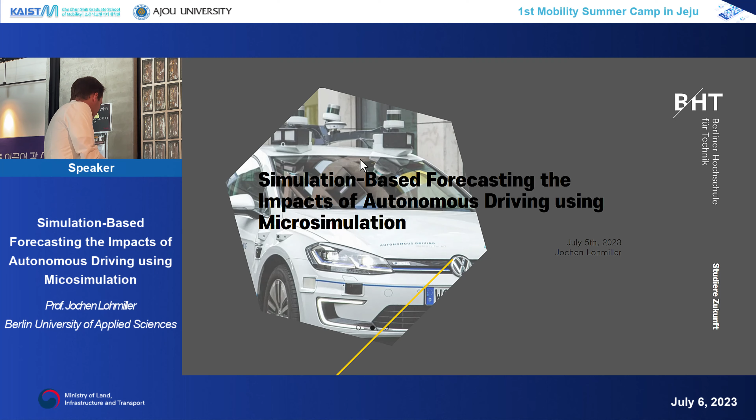I am ESFJ. I'm very thankful about being here in Korea, and this is what I learned last night. Never heard about this personality test before. I did it late at night, and I probably don't fully agree. I learned the E, and there's the opposite, I. And in all the other tests I did, I always was more introverted than extrovert. Anyway, I'm really glad about the opportunity to come here and learn from you like that.

As Ini was introducing me, my main focus over the last 8 years was developing the microsimulation product VISSIM, which I now also use at the university to teach. I'm a professor at the University of Applied Science.

University of Applied Science is different. In Germany, we have these different systems of normal universities and Universities of Applied Science. For Applied Science, we have 243 of them in Germany. Almost 40% of the students in Germany go to a University of Applied Science, and it's a very practice-oriented university. The goal is to make them ready for the industry as fast as possible.

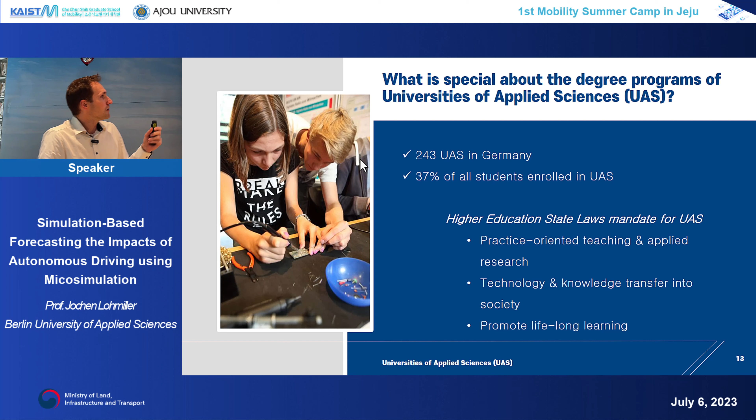So we do that, and actually one semester towards the end is mandatory to do in industry. They have to go to a company and work there for 6 months. That's part of the program, with supervision from my side and others. Two weeks back I was at a construction site because I'm in civil engineering, and I got someone from construction—I have no idea about what they're doing, but that was very interesting, and we supervise them there. They often get paid, and actually I learned that probably 80% of our students, even in the second and third semester, already have a job at a company. So they almost all work already while studying, even though it's a full-time study.

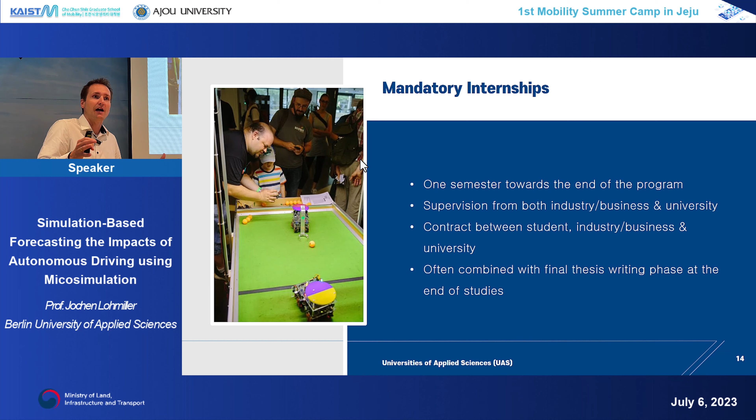For us professors, it also means we need to have at least 3 years of industry experience, otherwise you cannot become a professor at the University of Applied Science. When we develop our lectures and new programs, there's always someone from industry in the advisory board to help develop that. I ask a lot from industry about what students need to be ready for what you're searching for, and that keeps updating our lectures to stay up to date with industry's needs. That is well received from industry—they use the students quickly.

So that is the University of Applied Science. I'm not sure if something like that exists here, but in Germany we have these two different systems. We do less research—for example, in my case, I don't have any PhD students. Currently I could have, but I think the average number of PhD students per professor is something like 0.456, so it's very low. Not a lot of professors actually have a PhD student, so less research.

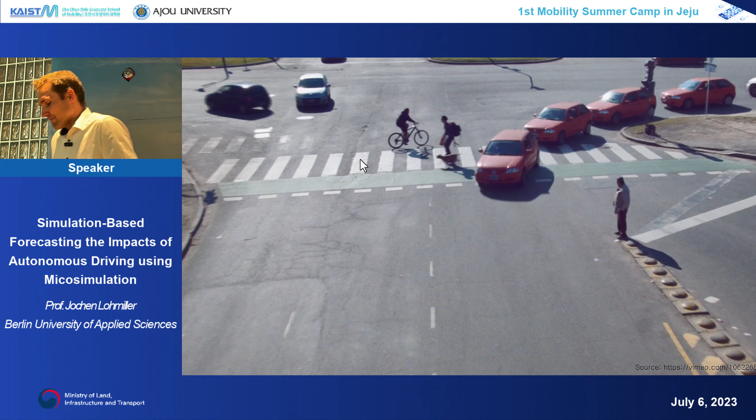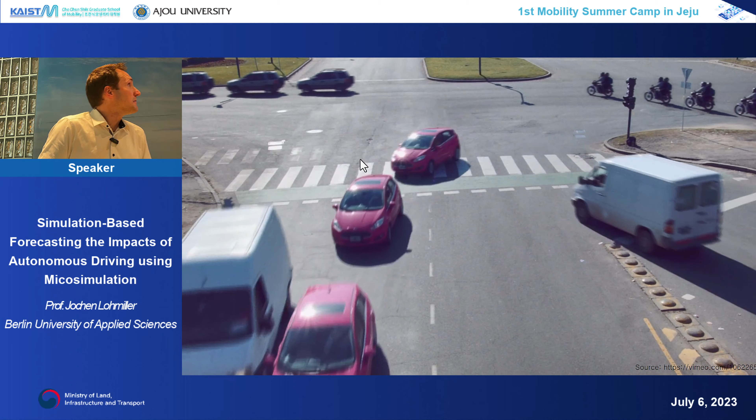Okay, now let's come to autonomous vehicles. The future might look very bright—we can have very effective traffic control. That's one scenario of how the future could look. Maybe it looks not so safe, but it is actually safe.

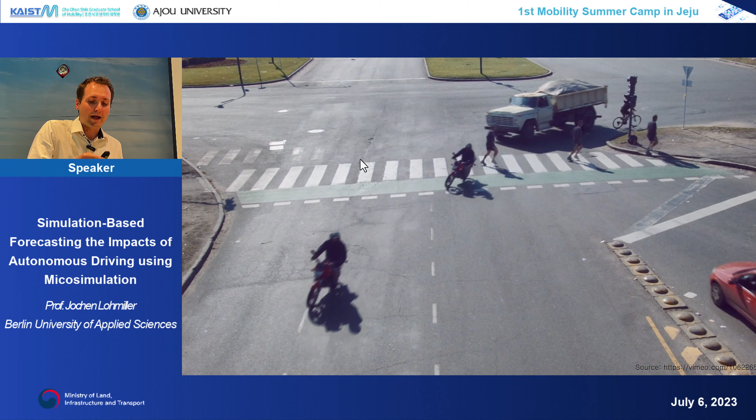There is no accident involved in that scenario. But the question is, how will that look like, and how will the efficiency of autonomous vehicles be? That's part of my talk today.

So the company is developing these algorithms. They promote themselves as building a safer driver, and actually I think 94% of all accidents are based on human errors. So that's a big potential. If that is automated, it probably won't become zero, but of course fewer accidents than now.

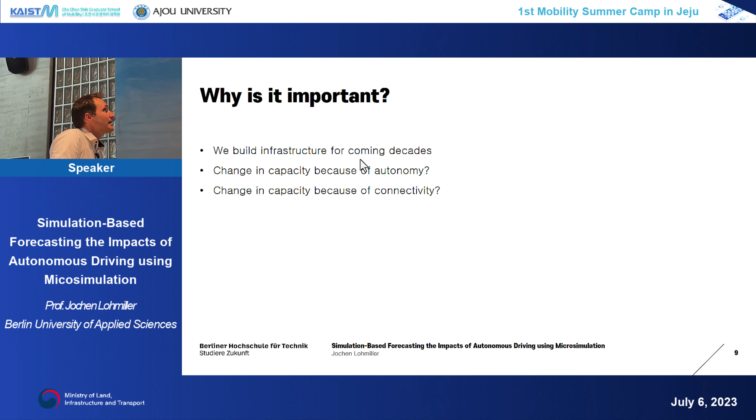But there are many questions, many challenges. Why is this important? I heard at one conference in the US, they were thinking about building a new highway, and needed to decide if it should be a 3-lane or 4-lane highway. The demand they estimated for the next three decades, 30 years, suggested that in 15 years they would need a 4th lane to maintain the growth in demand.

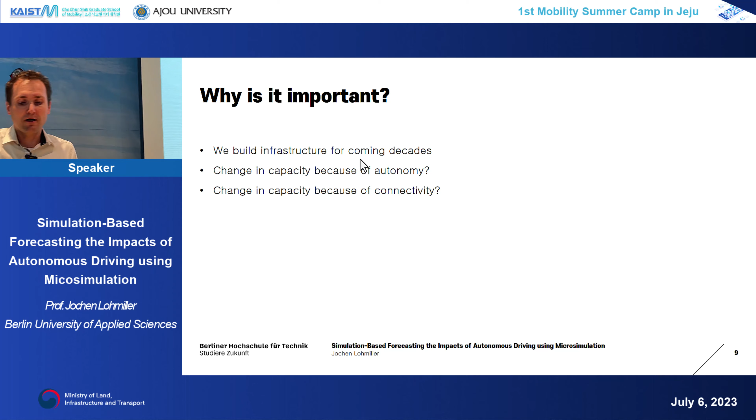The decision was then, okay, would we not have in 15 years a technology with higher efficiency on our roads, so that we could save the cost of the 4th lane—hundreds of millions of dollars—because in 15 years we don't need that much capacity anymore, since we have a more efficient way for vehicles to drive. For example, if we have a connected autonomous vehicle lane driving at very short distances, we get high throughput, and then we don't need the 4th lane anymore. These are decisions we need to make in an ideal way already today.

I'll show you one study, and maybe this lecture also has a bit of a European perspective: the Lisbon study. What they did is take the capital city of Portugal and try to see what would happen if we replaced all demand—every single origin-destination trip in the city on a given day—with an autonomous mode. What would happen then?

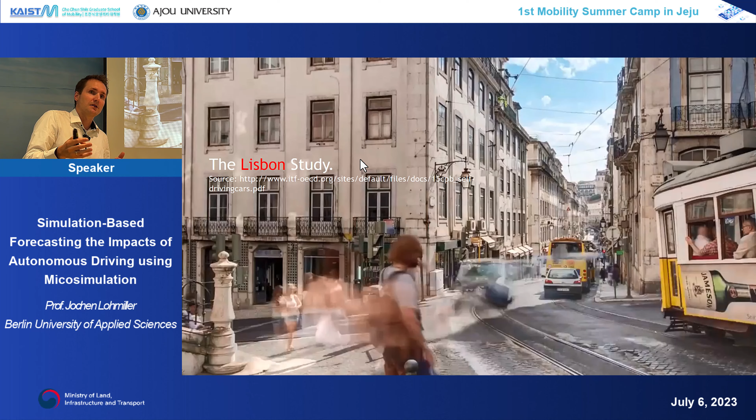So all bus trips, everything is replaced. The only thing we keep is high-capacity public transport, because if we dropped that, our cities would be destroyed. We need high capacity. Bus trips, single-person trips, everything is replaced by taxis, and we would only need 17% of the vehicles. That's a big opportunity.

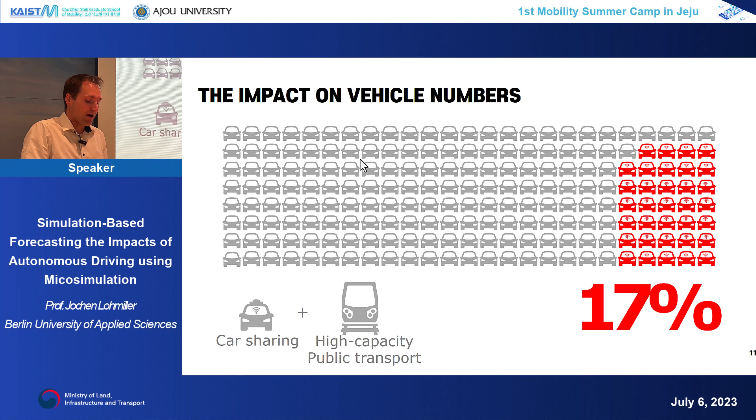It's not a good future for Germany and for Korea, because we don't sell that many cars anymore. And of course, the other big opportunity: we don't need parking anymore. We can give this percentage of parking spaces to others—restaurants, whatever. Yesterday we heard the city should have more of the function of hospitals and other things, so that's an opportunity.

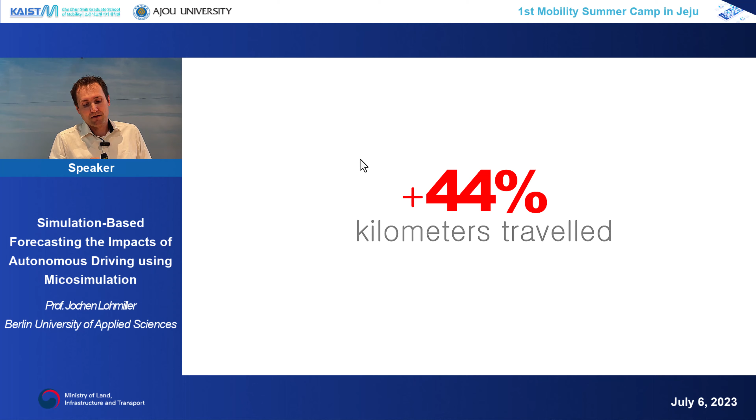But there's also a downside. In that scenario, there's 44% more kilometers driven. So we only have 17% of vehicles, but these vehicles operate not just 5% of the day—they operate almost all day long and need to travel more, picking up here and there, going back, picking up people. That's of course not good if we have that many more kilometers traveled in our city. So there are opportunities, but there are also concerns about it.

And what we try to do now with autonomous vehicles is very similar—we try to paint a picture of something we don't know. We don't know how autonomous vehicles will drive if we have 20%, 50%, or 100% market penetration. So we try to predict the future, draw a picture, and hope it comes close to what we will actually observe. This morning in the car we had a conversation—I heard that researchers in the 70s predicted that in 30 years' time, by the year 2000, they would be able to forecast the weather one year in advance.

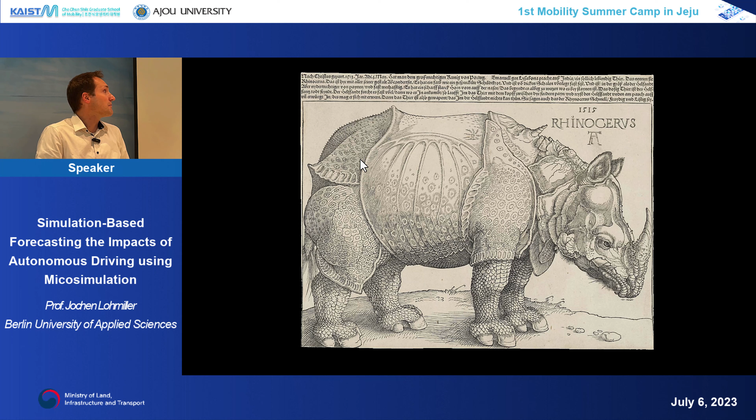So there are, of course, predictions which are positive and negative, but it's important to draw the picture as best as possible. How will the future look like? So if we think of our roads, we have capacity, currently around 2,000 vehicles per hour per lane for passenger cars. Now we have more, I use the term CAV for connected autonomous vehicles. So if we have a higher share of connected autonomous vehicles, how will that change?

One thing I see a lot of researchers having the same opinion on is that with a high share, ideally 100%, we have a higher capacity compared to today, because technically they can drive at shorter distances to each other. That's proven, that's possible. But what happens in the transition phase? Does it go directly up? Does it stay almost the same for a while? Or does it even go down because they drive very carefully in the beginning?

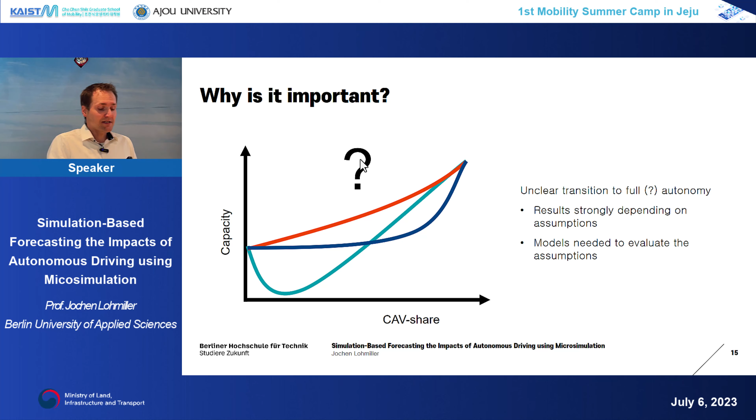So that's an important question, because before I show you some study, I would like to make a small poll with you. So if you can just scan that on your smartphone, then you should be able to enter a number.

Please enter a number in percent. For example, -10 if you believe, with a market penetration rate of 10%, the capacity will drop, then -5 or -10. If you believe the capacity with 10% market penetration rate of autonomous vehicles will increase, then type a positive number in percent. Just don't use the percent symbol, just use the number.

Did it work for some? Does it work? Yeah, okay. Just 12 more seconds, and then we look at the result. 3, 2, 1. Okay, I stop it now.

So 23 people have used it. The average is 9%, so you think when we have 10% market penetration rate, capacity increases by about 9%. Looking at the distribution, some of you say it will decrease the capacity, but most of you are optimistic. Some even say 50% increase with 10% market penetration rate. That would mean connected autonomous vehicles also influence human behavior, otherwise I think we cannot achieve that.

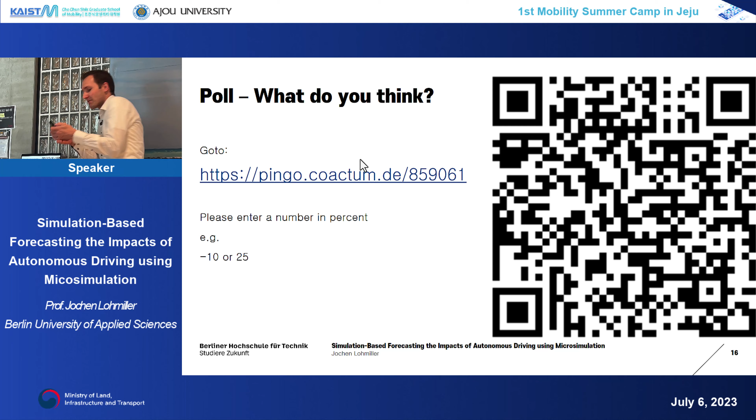So you estimate 50% capacity increase with 50% of autonomous vehicles. You're very optimistic, I think. But it's something we don't know, we'll find out. So thank you for joining, I'm always trying to get more information.

Now, a very simple model would be: nowadays we have a vehicle capacity of 2,000 vehicles per hour per lane if the headway is 1.8 seconds. That's what we have today. If we assume a headway of 0.9 seconds, we would double the capacity if we had 100% autonomous vehicles. If we had 50% autonomous vehicles, we would have 3,000, which is what you also estimated, with such a simple model, of course, with a lot of assumptions.

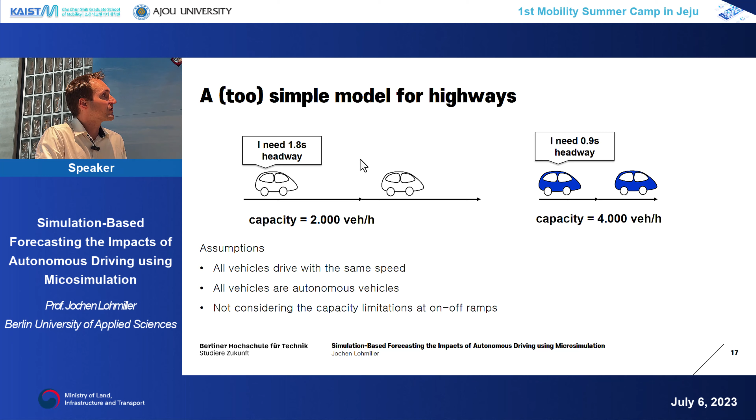A very prominent German study, made from a kind of government institution, was not so optimistic here. They said capacity goes down because they assumed a higher time gap for an autonomous vehicle, since an autonomous vehicle needs to drive according to the law.

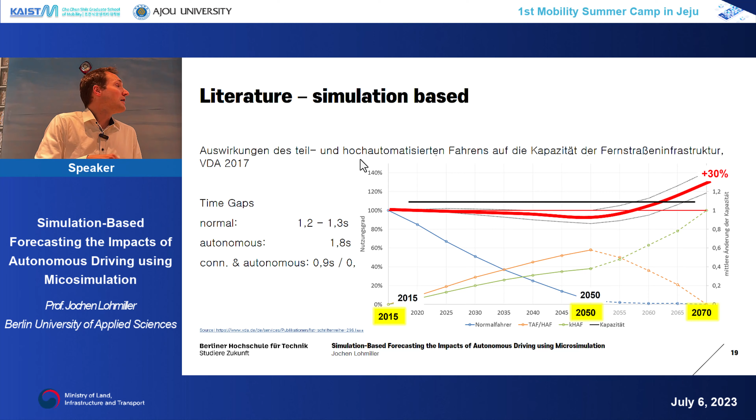If they are connected, then we can go down, and then we see the benefit. So they prognosticate like, okay, here's a market, here's the change in capacity, 30%. This is one, that is the years here, and this is the market penetration rate. So the penetration rate of human drivers goes down, even to 2070, to 0%. And then we have here different levels of these vehicles, and in the end, benefit from it. So there was a prominent study saying it goes down in the beginning.

Another, it's a completely different approach from a study made here by someone who was saying, okay, if we have autonomous vehicles, they drive as it would be a railway, and they need to behave on these technical standards now in California for high-speed rail. And that regulation says the maximum longitudinal acceleration is very low, 0.5. The deceleration is also very low for high-speed rail trains. The question is, of course, can you compare vehicular traffic with high-speed rail on the streets?

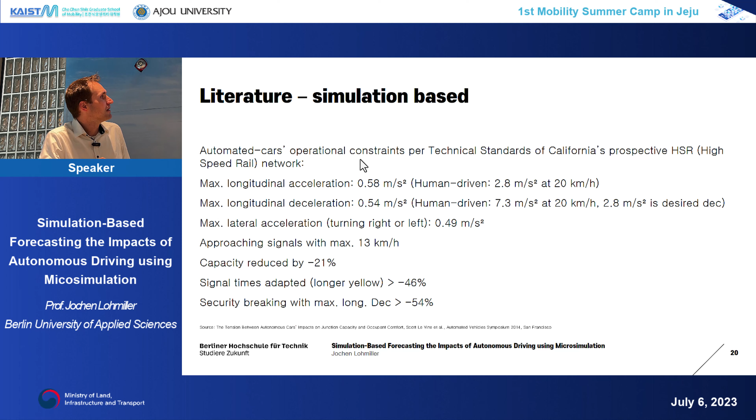Yeah, but just with that assumption — if probably it's not right to take this assumption, but if we do that, then capacity would be reduced by minus 21%. If the signal time is adapted, because we have very slow braking here, so we need to give longer yellow, then it's even worse. Another approach, another result. So we see a lot of results.

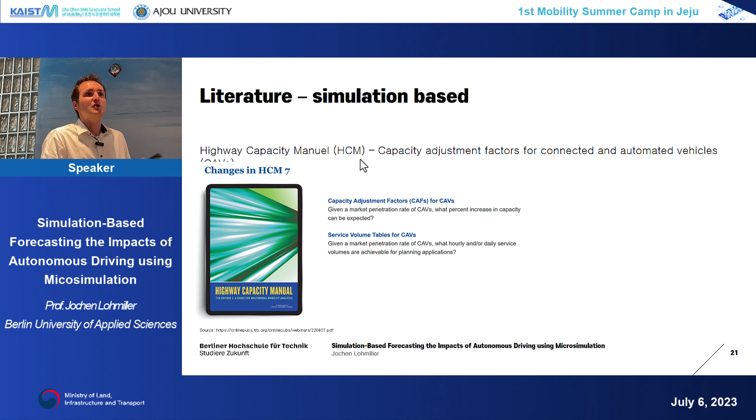One of what I think is the most prominent result in how the future of traffic flow capacity will look with connected autonomous vehicles is in the Highway Capacity Manual, the newest release. Do you follow that? Do you read that? Highway capacity, okay. So you've seen that already, these, okay. Then I don't need to tell some of you.

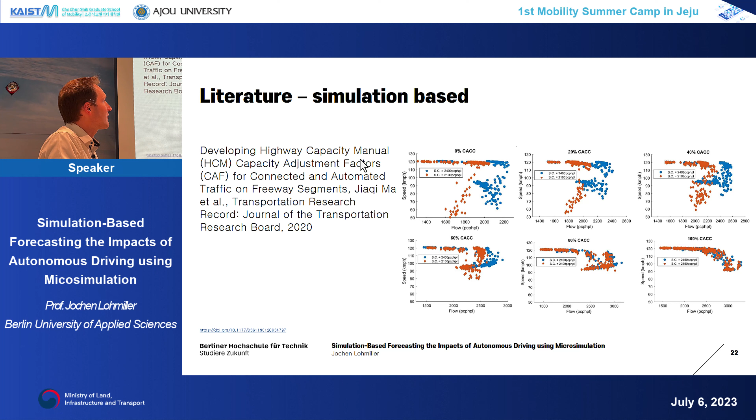Of course, the result here is independent of the starting capacity, because in the end we have 100% connected autonomous vehicles and they drive similarly — connected and automated at the same time. They share the information. Otherwise it's not possible. I'll show a graph later on that as well.

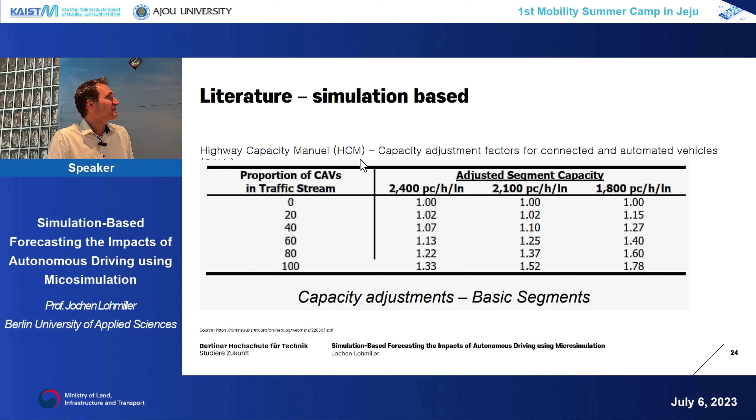So these are the numbers, and the numbers here are the percentage increase, meaning, for example, if we have a base capacity of 1,800, then for 80% proportion of connected autonomous vehicles in the traffic stream, we'll have a 60% increase, meaning capacity is multiplied by 1.6. And they publish these in these very, very official guidelines. With that, you can work, and that is probably the most solid. Simulations have been done with VISSIM here as well, which I sometimes thought — oh, I know how many bugs exist in VISSIM — and they derive these capacity levels from it. But yeah, probably there's no other way of doing that. So they did that also.

I'll go through a little bit faster now here.

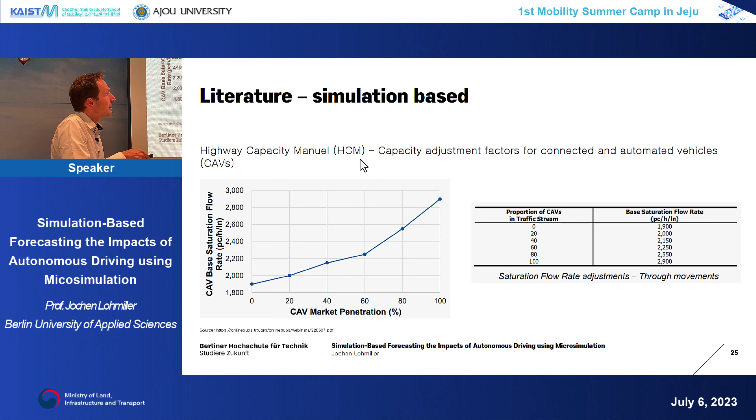This is for movement, for signalized intersections. They did these factors for signalized intersections too, but here they don't have the factor—they just have the base saturation flow.

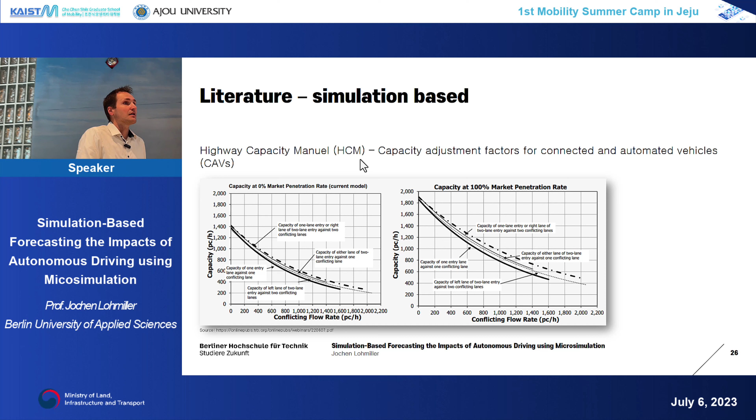So they have it for almost all facilities—these capacity adjustment factors, as they call them. Okay, so we have them, but what do we do?

There's a lot of studies being made here in Korea. How can we do our own studies? And you do that already. During the time I was at PTV, we decided to make this driving behavior available to all customers who want to use it, because not everyone has the driving behavior of autonomous vehicles.

Ideally, we hoped to get information from Groupe Renault, which is an OEM, but we also had VEDECOM, a French company developing an algorithm for autonomous vehicles. We wanted to look at how they drive and replicate that in Vissim to make it available for everyone, because not everyone has access to data or to the algorithms, and even if you do, you still have to program that connection.

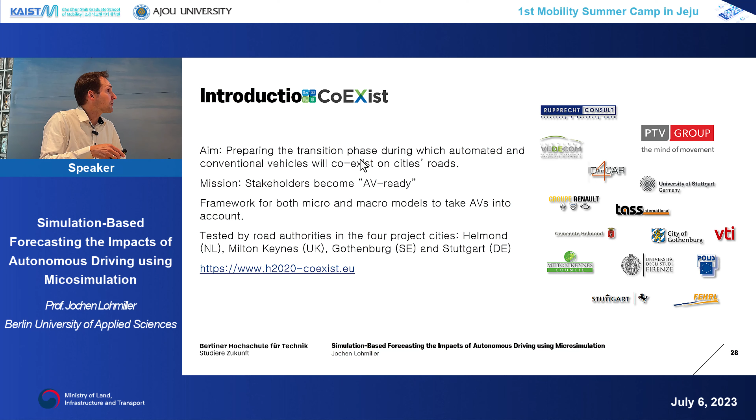Cities were interested—we had 4 European cities from different countries, and we made the studies. A little bit sad was that Renault changed their strategy on autonomous vehicles and dropped out of the project, so we didn't get any data from them.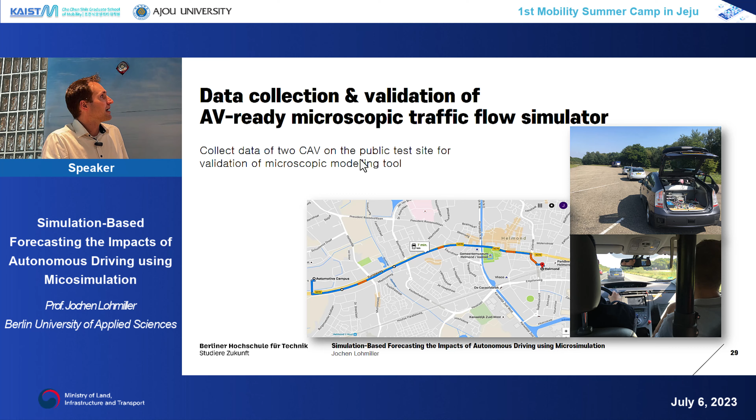But we got these prototypes of autonomous vehicles, and we drove them to look at how they behave. For example, here there was a manual driver in front, and then two vehicles driving automated, sometimes with connectivity switched on, sometimes off.

What we see here is the vehicle speed. If we have higher speed, then on the y-axis is the distance between the two vehicles, and of course there's a linear increase—with higher speed, we have a higher distance kept between this prototype.

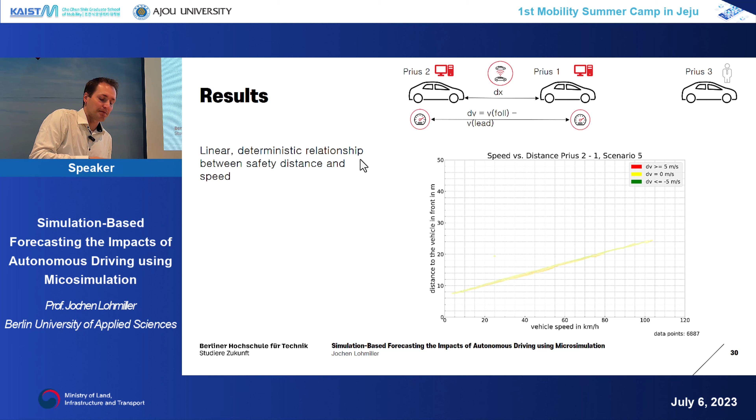That's the first thing, and now it comes to the connectivity part. Here we see the delta velocity—this means the leading vehicle was faster, or the following vehicle was faster than the leader. Negative means the leader is faster than the other one.

Here's the distance. What you see is if connectivity is switched on and they drive the same speed, delta velocity is 0. At speeds of 120 km/h, they keep a distance of 14 meters. If connectivity is switched off, they need to go back to 38 meters distance—so there's a huge difference between connected and not connected.

Also, even when connected, they could not really keep the exact same speed—there's a little oscillation, and here a stronger oscillation, around delta velocity 0. The following vehicle tries to keep the same speed as the leading vehicle, but it's not perfectly possible.

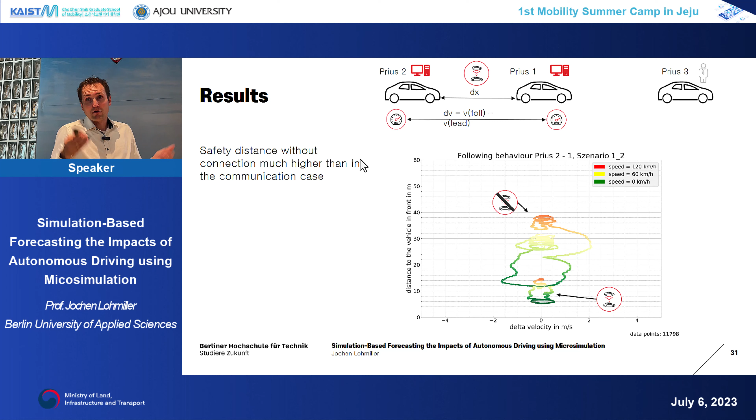We thought we needed to develop a new algorithm in Vissim for automated vehicles, but it was estimated to be a huge development effort, so we tried first to calibrate the existing model. This is what we observed from the automated vehicles versus Vissim's default human behavior—there's a big difference.

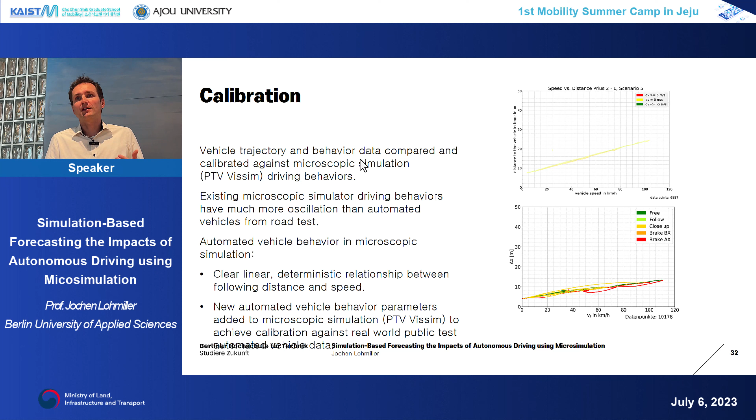So we tried that, and in the end we achieved something like that. It's not perfect, but it's getting close. We needed to make some adjustments and add extra parameters to the model, but we came close enough that we felt confident providing it to our customers.

We also developed a platooning algorithm, which basically makes perfect car-following driving behavior—that can also be done. That is really connected, so they get information from the leading vehicle, while with all the others, they don't.

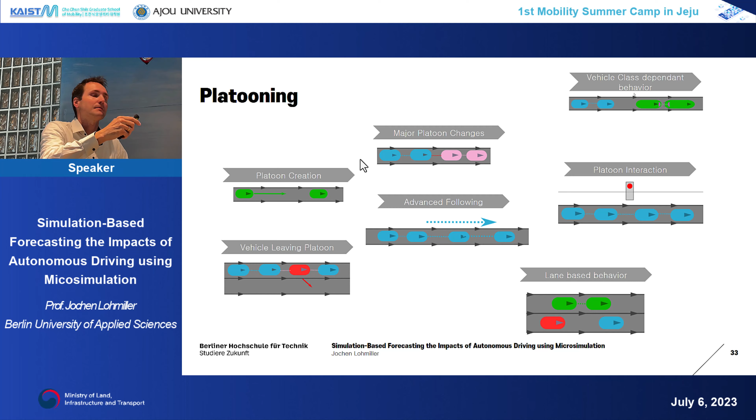And those were the new driving behaviors—this is normal human behavior, and then we had three different types, depending mainly on the time gaps: cautious driving behavior, normal driving behavior, and aggressive driving behavior.

You see here the time gaps between them. Red, cautious, having more headway compared to the human driving behavior. AV normal smaller, AV aggressive even smaller. But you see, it's not always the same. There is some variation. They just drive aggressive, but it's not like connected. Here with the platooning, this is very stable. Here, that is really perfect connected vehicles.

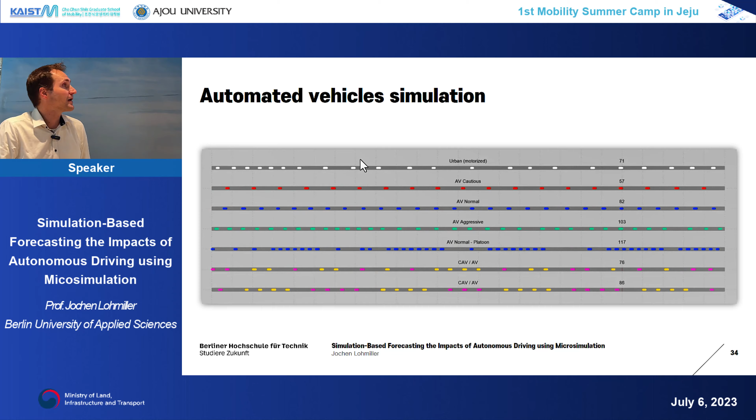What we also introduced is, for example, if you have different manufacturers, so the yellow ones, they can talk to each other, the purple ones, they can talk to each other, but purple and yellow cannot talk to each other. So to model that, it is also possible that you can make decisions about, okay, what is my leading vehicle? And depending on my vehicle, if it's also a yellow vehicle, then I can be connected, keeping shorter distance. If that's a purple vehicle and I'm a yellow vehicle, I cannot talk to them, and then I need to keep larger headways. So that was also implemented.

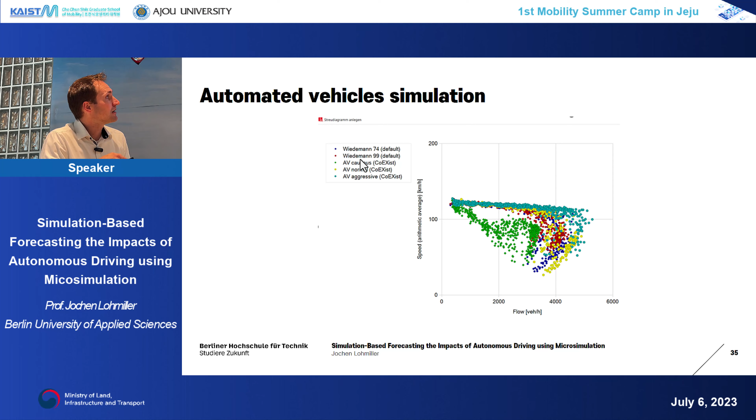Resulting in the speed flow diagram, here you see clearly the aggressive with the smallest headways, of course, reaching the highest maximum throughput, the highest flow, here in the speed flow chart. Good. Looking now at the cities, not all cities did micro-simulation experiments. In that project, we also expanded VISUM, the macroscopic tool from PTV, so that it's capable of handling autonomous vehicles and estimating more on the demand, the routing side.

But Helmond, Milton Keynes, and Gothenburg from Sweden, they did some micro-simulation experiments, and I'll show you some use cases. So Gothenburg, they have an extremely growing population, and long-term a lot of construction is needed to prepare the infrastructure for that population growth. So they wanted to do that, but that was macro. And they wanted to introduce a shared space. Shared space meaning vehicles don't have priority, and basically everyone on the road, if it's pedestrians, cyclists, or motorized traffic, they all have the same rights.

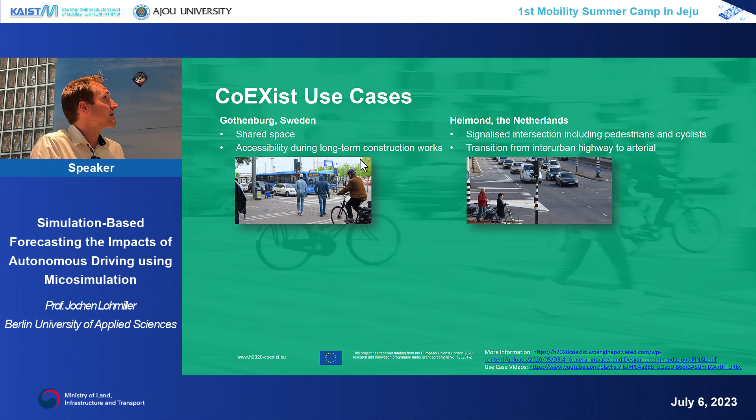Helmond in the Netherlands, that was very classical traffic engineering, a signalized intersection with pedestrians. The Netherlands have a very, very high mode share of cyclists and pedestrians, and how the transition will be from interurban highway to a city arterial. Milton Keynes is a city with a crazy number of roundabouts. They wanted to have this priority junction operation at roundabouts and also waiting and drop off.

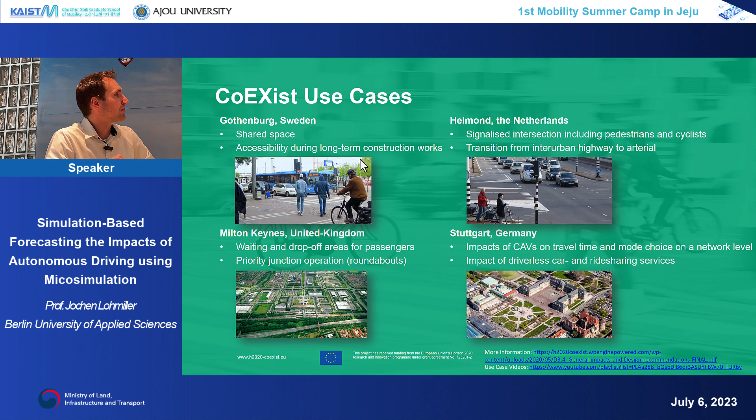They have lots of parking spaces around their city, and they want to investigate, okay, if we would have pick up and drop off, so basically you're driven to your workplace, you get out at the main door, and then your automated vehicle will find a parking spot itself. And Stuttgart was just doing macroscopic analysis. So one thing I wanted to share from what the cities did is an interesting experiment design. And the approach was like that.

So we had here different stages. So that's basically the future. Today here, we have no autonomous vehicles. Then we have an introductory phase, established and prevalent, so further in the future, the more we go down. For those different futures, we had defined different AV penetration. So we were not looking at simulations with 100%, but 25, 50, and 75. And the difference between 1 and 2 for the different futures was, at the beginning, the assumption was the autonomous vehicles behave very cautious, very careful. Then they drive in a more intermediate mode, and in the end, they drive more advanced.

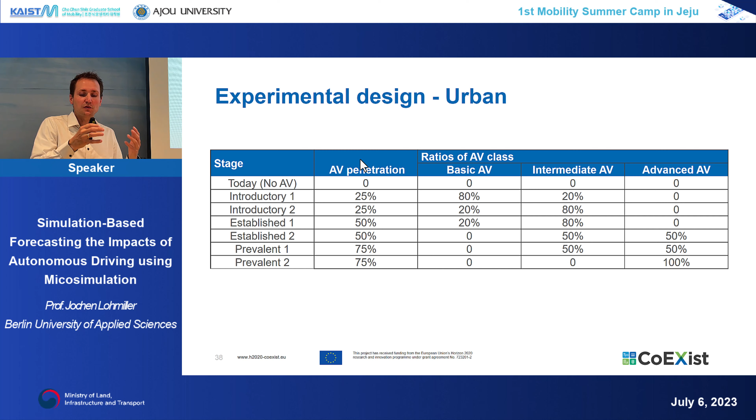So you see here, for example, for introductory 1, we still have 25% penetration rate, but out of that 25%, 80% are basic AVs, 20% intermediate, and for introductory 2, we have switched it. There are more intermediate autonomous vehicles than basic. Okay, that makes sense to use that. But there's another thing which comes into account, and that is road types. So the assumption in the project was also for different road types. For example, in the city, we'll see autonomous vehicles driving much, much later compared to highways. Highways are easy, but in cities driving is difficult.

So there was this differentiation made for basic AVs. We use cautious for motorway and arterial, but for urban street and shared space, we still use manual for the basic AV. For the intermediate AV, we use normal for motorway and arterial, and here cautious, and for shared space, we never used the all-knowing AV behavior. That's only used for motorway and arterial here. So the cautious, normal, all-knowing, that is basically what you could imagine. This is a time gap.

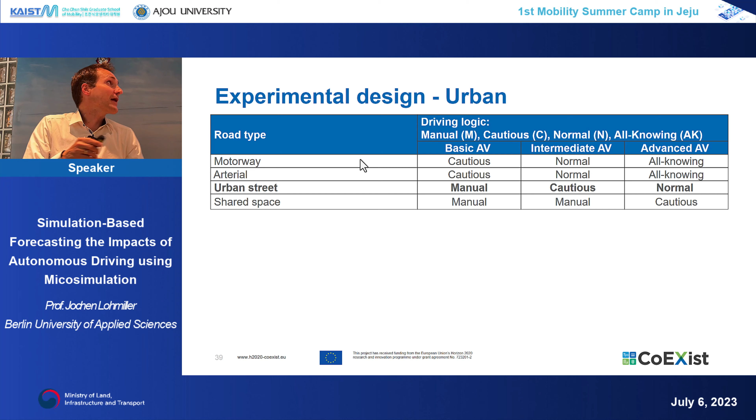Cautious, very cautious, yeah, that's what it says. Normal is like a human driver, and the all-knowing, we later renamed it to aggressive. That is really short, I think 0.6 in time gap. So that combines, again, that's the same graph as the previous slide.

You see here, so if we have introductory phase 2 and we are looking at urban streets, we have 20% manual because we use this. We use basic AV, and basic AV for urban street is manual, so 20% manual. And for urban street intermediate, we use 80%, we use cautious, and that's the cautious. So that's a methodology behind to predict.

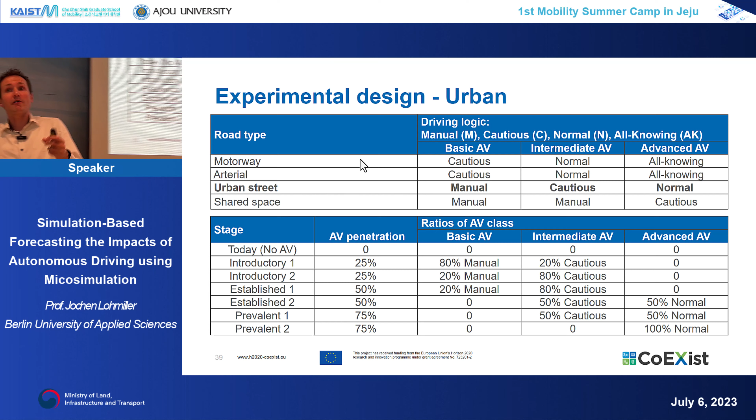So not only 5%, 10%, 30%, there's also this dimension in what is the progress in autonomous vehicles behavior, because they learn they will be getting advanced in the future, and also this dimension of different road types. It's easy to drive, it's hard to drive. And that combined led to these different scenarios. And that was what they were executing.

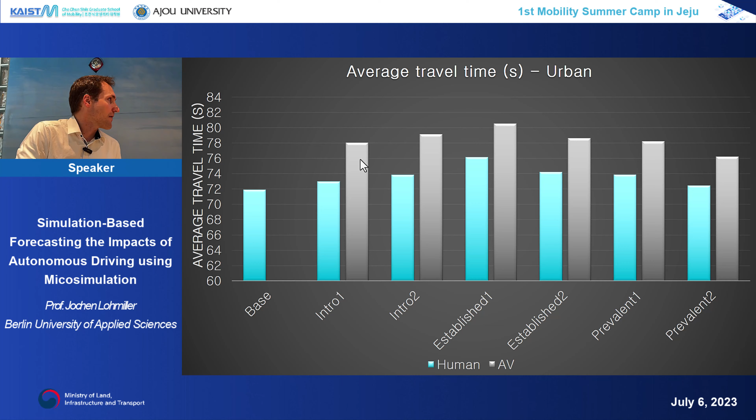And that is results from Helmond from the Netherlands. So these are basically now the times: base, intro 1, intro 2, established and prevalent. This is urban, and we see here travel time. Travel time going up for human-driven vehicles and for autonomous vehicles.

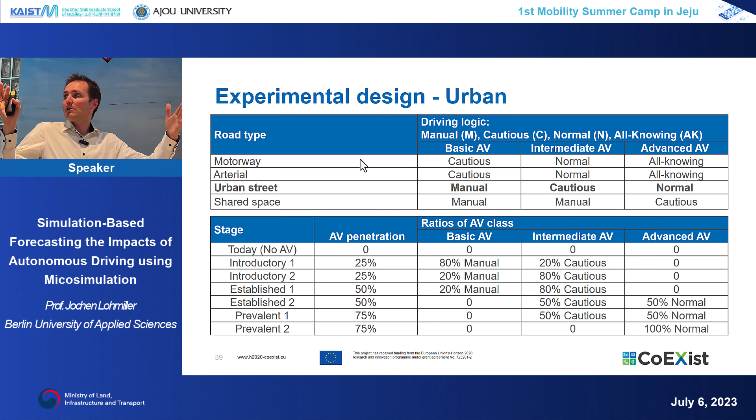That is because, we jump back to the last slide, we have here intro 1, intro 2. Intro 1, intro 2 uses cautious driving behavior. Cautious driving behavior is longer time gaps than before. And that's why higher time gaps come into the simulation, and then it increases the travel time.

And only then later on, we have the normal driving, and the aggressive is not even used here, then we benefit. And in the end, we don't benefit. In the end, it will be something like today, if we have that, not this all-knowing aggressive driving behavior. Yeah. Higher AV, higher travel times for AVs compared to human-driven vehicles.

Why is that? Does anyone have an explanation? What do you guess? Why is the travel time for an AV higher than for a human-driven vehicle? How fast do you go if there's a speed limit shown of 50? Who's driving exactly 50 or under 50? Yeah, you're honest. Who's driving faster than 50? No one? I don't trust you.

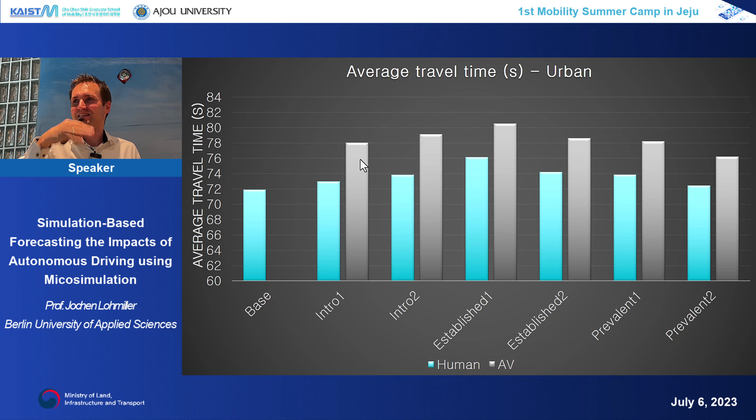Normally, at least in Europe, Korean you might be very correct, but in Europe we all go over speed a little bit because we know the car, what is displaying. It's 55 displaying, but if you check GPS, it's actually just going a little bit faster. So we use that and go a little bit faster. And that's also, of course, the case for simulation. The desired speed in Vissim language is higher for human-driven vehicles. And of course, AVs, we assumed they don't go over speed.

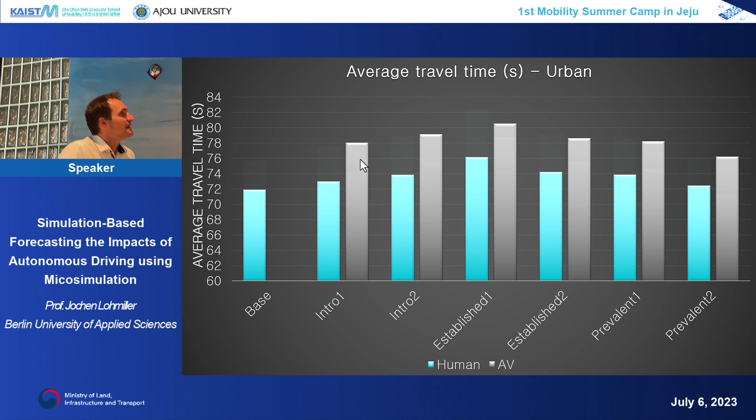This I learned today also in his car. If it's automated, he cannot go over the speed limit, right? Yeah, you cannot, which makes sense. But, and that's the other side, then the delay is less. But that's, of course, just because of how Vissim calculates the delay. It's the desired speed. So humans want to go at 60 kilometers per hour, but they had to stop at the signal. And then they accumulate more delay compared to if you would have wanted to drive 50 kilometers per hour.

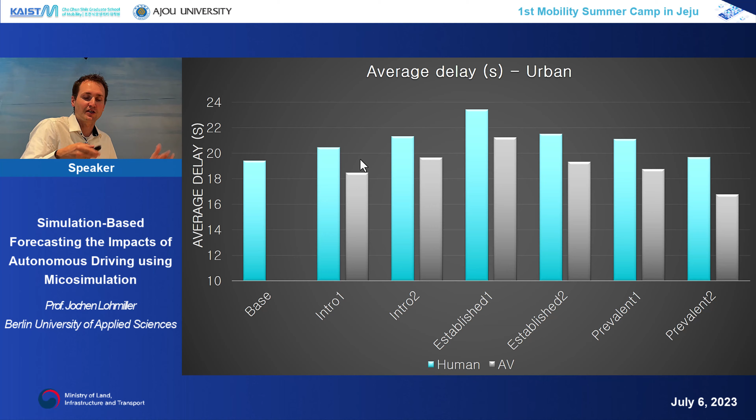Okay. One other section is now, why do we do Vissim simulation at all? So the benefit of simulation is clearly we verify what we have thought of. We use it for communication, a lot of videos being produced to show it to the public. We detect unaware issues. We compare different scenarios as we did. We give decision support, and we evaluate the impact of certain assumptions, like autonomous vehicles.

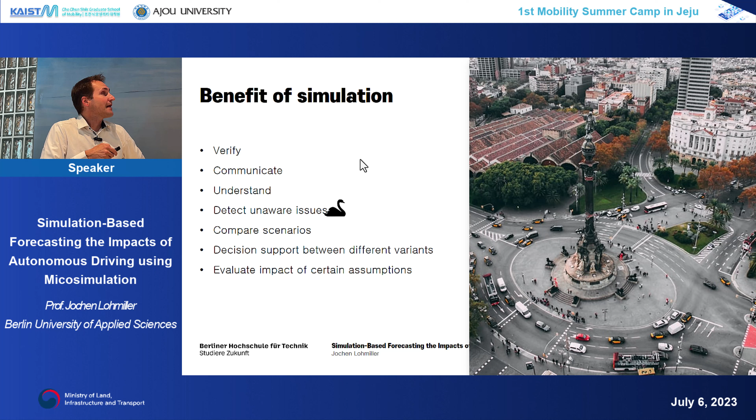And the main part is this one, detect unaware issues. And that is very crucial and a strong argument for simulation. And I want to dig into that a little bit. There's a quote from the former Minister of Defense in the US, Donald Rumsfeld, that there are known knowns, the things that we know that we know. You know that you know how high you are or what you're doing.

But there are also things that we know that we don't know. I know that I don't know what to say, hello, I'm Jochen in Korean language. I know that I don't know that. Yeah? I know things which I don't know. But then, and that's the problem, there are things we don't know that we don't know. Yeah? And this is where we make mistakes. You're not aware of something, and this is why you do the studies.

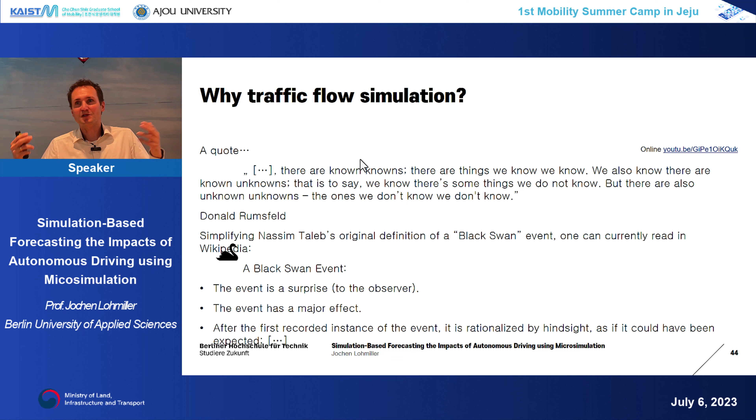You learn things that you know, but probably before you entered your master's or your bachelor's, you didn't even know that such things exist, yeah? Especially in transport modeling. And this is what we want to identify.

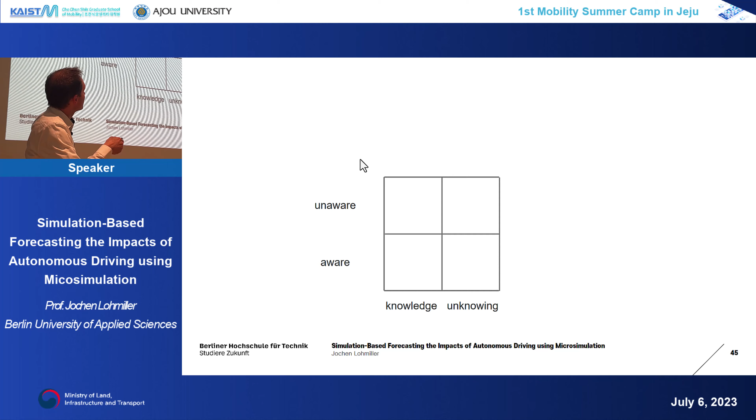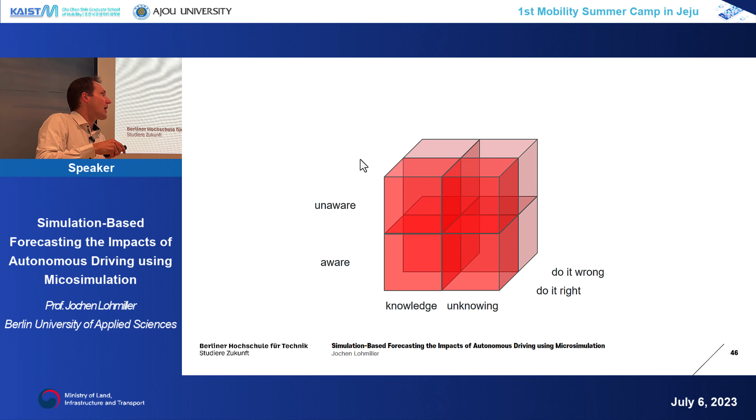So in the end, we have these different dimensions, and of course, this is the ideal case of planning. Things we know and we are aware and we do it right. If you know it and you are aware of it and you do it wrong, that's criminal. And that happens as well. If you are aware, but you don't know it, and you do it right, it's just gambling. You know you don't know it, but you just do it. It's either you have luck or you have bad luck.

If something you know but you're not aware of it, that's something we call routine. You just do it. You don't really think about it, but you do it right. If you make it wrong, this is just careless. You just make mistakes. Actually, you should have known it, but you just didn't think about it. You weren't aware of it, and you make a mistake.

Same with unknowing. So you're unaware, and you don't know that you're unaware. So these are the things you don't know that you don't know. If you make it right, it's just random that you make it correct. It's luck, and it's bad luck. So in the end, we want to be here. We want to do it right, and we want to be aware, and we want to learn from it. And of course, everything doing it wrong, we want to try to avoid.

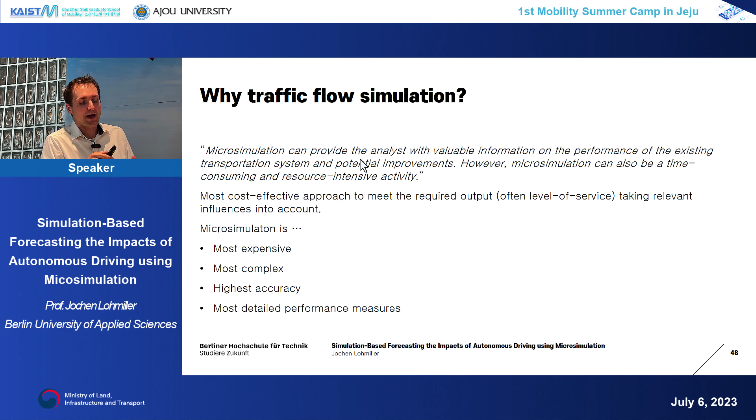And microsimulation is often not the cost-effective approach. It's the most expensive, most complex, but of course it has the highest accuracy and the most detailed performance measures. And for things you're not aware of, simulation helps you to think about it, to make that transparent, and to avoid the mistakes. But often simpler approaches like deterministic models, like the HCM, or I think I heard you have a Korean adaptation of the HCM, are enough to do a traffic analysis. I have seen so many things done wrong using microsimulation.

There are so many parameters you can adjust, and you can misuse this easily. You can fake everything, and that is of course a big thought, misuse. So listen to your lecturers, what they tell you about simulation, so to make it right.

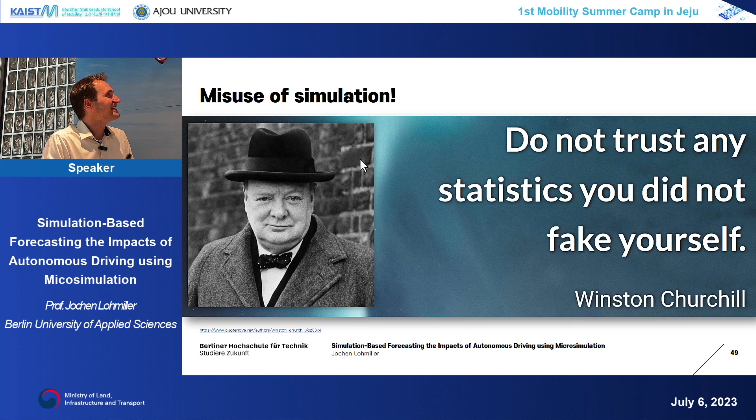Now on autonomous vehicles, it's not only about throughput on single lanes, there is much more. I refer here also to a European project called InfraMix. They looked at many more scenarios using microsimulation, and in that project they even coupled it with a vehicle simulator. They looked at active traffic management: what can we achieve with dynamic lane assignment for automated driving, what can we do with roadwork zones, how will traffic flow improve in bottlenecks, and so on. So there are many more opportunities we have from a traffic management perspective with autonomous vehicles.

First, with the information, we have the data. We know where vehicles are, and we know where vehicles want to go in an ideal case. There's much more possible here, and this is what they did.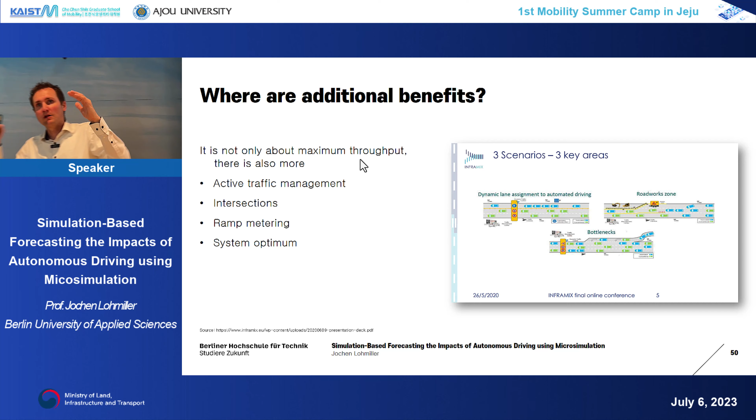Also on intersections, think of ramp metering systems. There we can achieve it, and even a system optimum, not a user optimum. Some vehicles drive longer, but in the end the total delay time of all will be reduced, and that's what you would want as an economic outcome.

But I'm not going too much into detail. I'll just show you some tips and tricks for modeling autonomous driving in Vissim. There are these CoEXist parameters which you can adapt. From CoEXist, from the observations we had with these prototypes, we set the time gaps to 0.6, 0.9, and I think 1.8, and there are more parameters you find in the driving behavior.

There's even a tab for autonomous driving, which you can set also for platooning, making your assumptions. Additionally, there is lane-based driving behavior, meaning you have a different driving behavior if you drive on a different lane on a link. Why is that? You change your lane, and suddenly the vehicle changes behavior. Where do you have that?

There's the overtaking lane on the highway. On an overtaking lane you typically accelerate, go faster, and may accept shorter time gaps to the leading vehicle.

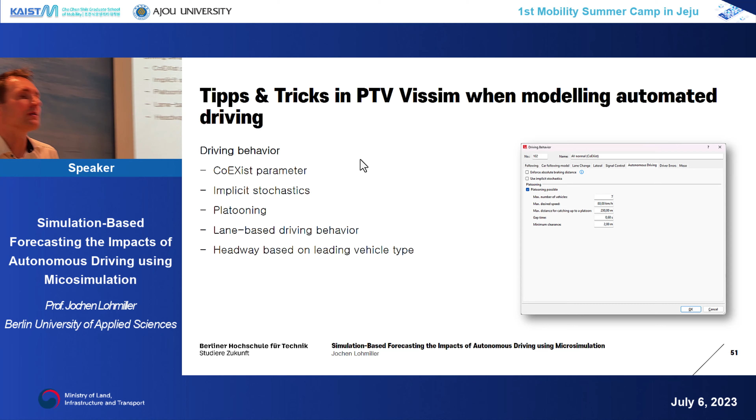Thinking of an example here: it could be that in the future, as I said from the US case at the beginning, we could have something like a CAV lane, where only connected autonomous vehicles are allowed to drive, because they have an efficiency advantage. They can go with very small headways, and we want to sort basically the ones who can drive at shorter distances compared to human-driven vehicles, achieving a higher throughput.

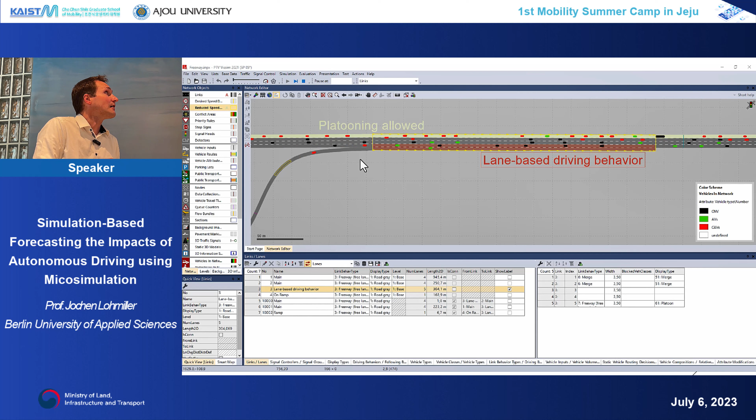Or even in merge areas, you sometimes use higher safety distances so that other vehicles can enter the highway more easily. So we developed that back then, when I was at PTV, specifically for automated driving use cases.

There are some examples also for communication, how to model that. One example is where a vehicle has broken down on the highway, and it informs other vehicles to reduce speed.

Another is adapting speed to arrive at green: the vehicle gets information on when the upcoming signal will turn green again, and adapts its speed so it doesn't need to stop but goes directly through. Or in terms of routing, you can make decisions where autonomous vehicles get routing advice and know where to go.

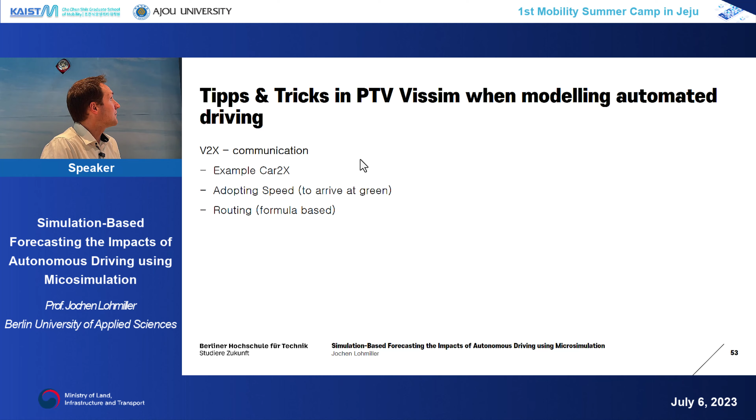This concept is what we introduced in Vissim back then, especially user-defined attributes and attribute modification. I think it's very powerful. Previously we had to write scripts like that, and that can be replaced just by these four elements.

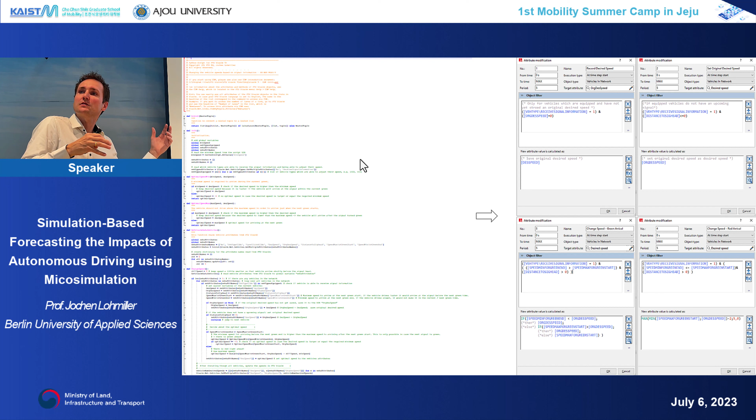These elements are attribute modification, and whenever you need to do something in Vissim, like for autonomous driving but not only that, where it goes beyond the capability of Vissim, I recommend you first try that with user-defined attributes and attribute modification. That's so much easier.

I did that the first time with my students, and when they saw they didn't need to do that anymore, they were all happy with it. So just as one example, here's this arriving at green scenario.

Imagine you have a signal that's red, and the vehicle gets the information that in 20 seconds the next signal will be green. Then your vehicle will adapt its speed to arrive at that time. So we have the target attribute for each vehicle, the desired speed, and we change the desired speed. Desired speed is what speed do I want to drive.

We filter first only for the vehicles who are able to receive the signal information, and then apply some conditions: if the speed is higher or smaller than that, if you can make it basically in the green time, then change the speed and calculate the new speed, if it's smaller than the original speed, and so on. I think you get the idea.

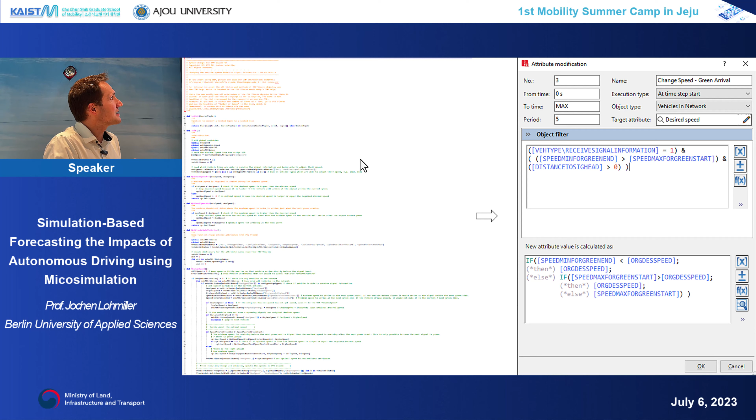It's not for me to teach how that's done exactly, but just the methodology of this attribute modification, which is quite powerful to use. So that's some tips and tricks: create your own attributes as much as you want, and use this attribute modification. That helps you very much in modeling some scenarios, even models that run completely without a script.

I think it's also available in the examples. That is basically a delivery scenario. We have here 4 different depots, and they are stochastically creating some demand from the depots to deliver packages from one terminal to another terminal. We have these 4 taxis or vans who deliver the parcels, and they are sent to specific locations to pick them up and drop them off.

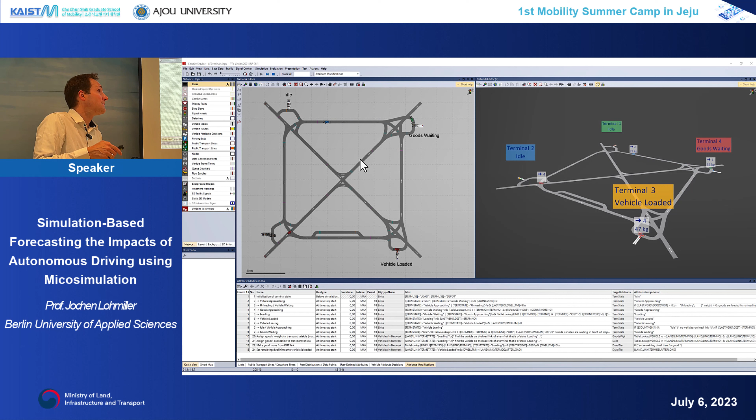In terms of automated vehicles, there's even more which I haven't talked about. What we normally consider in transportation is we make a location decision to go somewhere, we take a vehicle or buy a ticket depending on whether it's public transport or vehicular traffic. We have activity choice, destination choice, mode choice, departure choice, route choice, speed choice, lane choice, and in the end, in the operation, headway choice.

So many choices - which parts affect autonomous vehicles? That is something AVs will decide, and we can then estimate what the maximum throughput is. Will route choice be influenced by AVs? Maybe - we'll have platoon lanes where you can go faster, and you may change your routing just to take advantage of that. Maybe mode choice, destination choice too.

If you have an automated vehicle, you don't need a driver's license - just hop in the car. In Germany, getting a driver's license costs about 4,000 euros, so not everyone gets one. And if you suddenly have the opportunity to take a car which previously wasn't available to you, that will change with AVs.

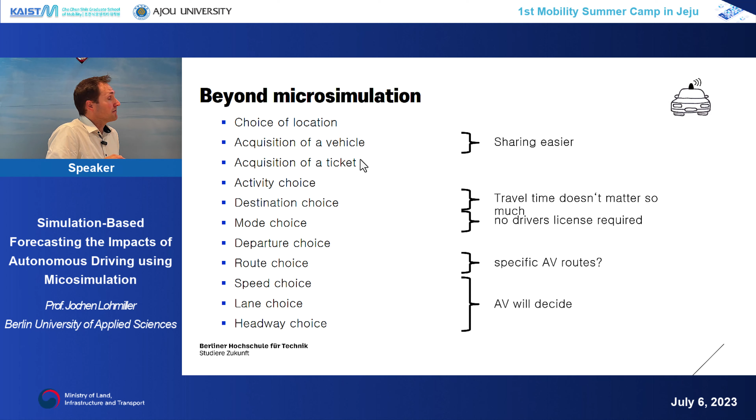Acquisition of vehicles - sharing becomes easier. You can rent my car, no problem, I don't need to drive it, it can drive automatically. So it's much, much more than what we consider in microsimulation.

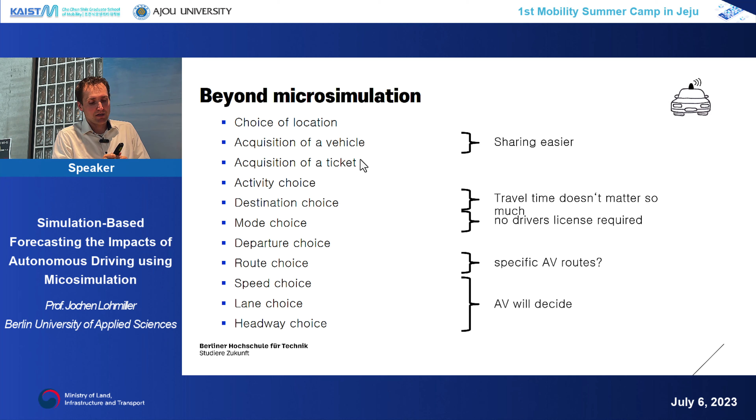And that is of course very interesting for the future, to paint this picture of how it looks in total. We just look now more at throughput - that will be interesting. Choice of location, rural areas becoming easier to access, is of course also an option.

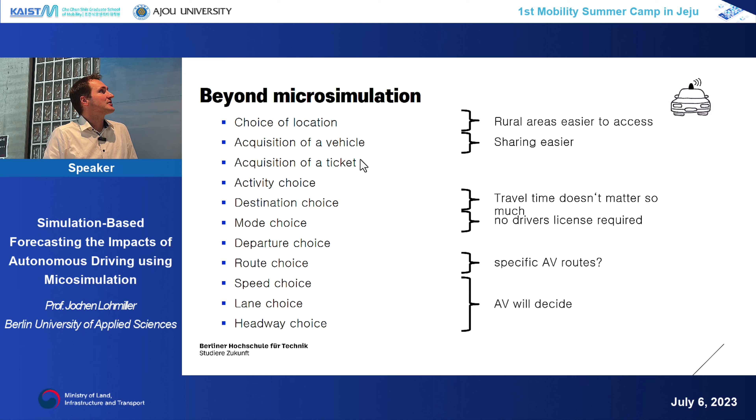I would think, but our models - if travel time doesn't matter so much and you can easily drive somewhere, maybe we'll see people going more out of the city, if of course the road capacity is enough, because commuting time isn't considered as bad as it is now, because I don't need to drive. But I don't know. So AVs will influence our behavior.

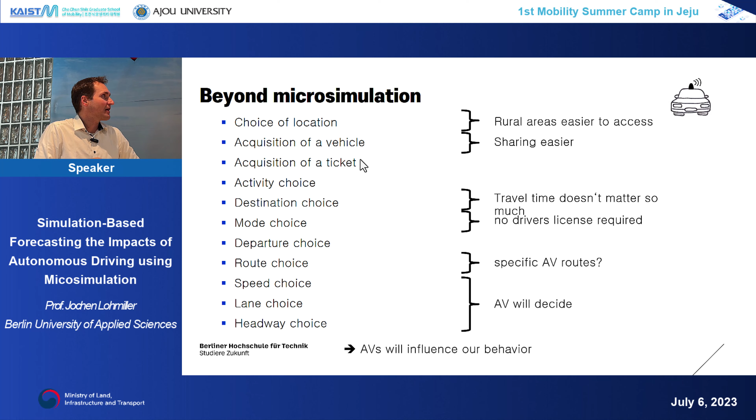In the end, I'll just end with a quote: the best way to predict the future is to create it. So you are transportation engineers, the decision makers of the future. And instead of just looking at how it will become, we have opportunities to decide and create this future through regulation - what is allowed, what is not.

So we don't need to wait for that, but we can influence that, and you can influence that. So, that is of course important.